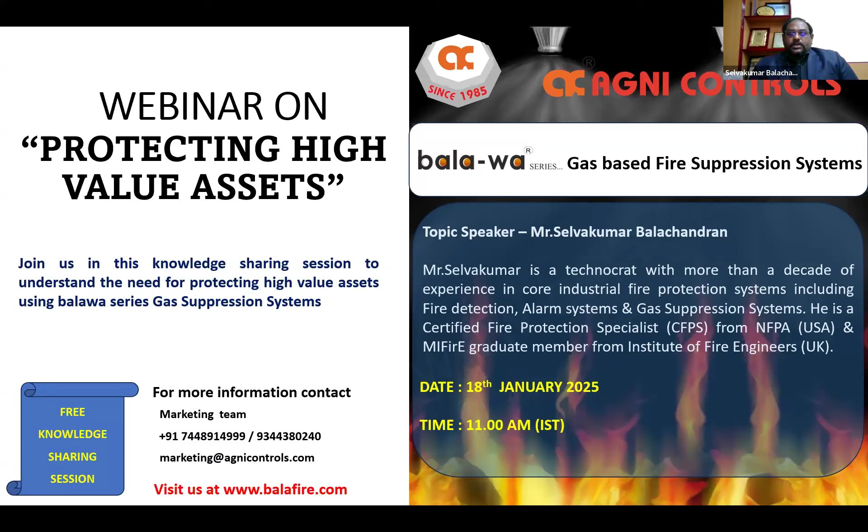Agni Controls is an industrial fire protection OEM manufacturing company and a turnkey solution provider. The company was started in 1985 by our founder and group chairman, Mr. D. Balachandran. He's an industrial expert and a stalwart in the fire protection industries, known throughout the fire protection industry across the world.

We initially started as a custom-built electrical panel manufacturer way back in 1985, and fire alarm control panels was one of the custom-built panels, and that was our journey into the fire protection industry in 87 and 88. Our first suppression system, along with the customized fire alarm control discharge panels, was commissioned in 1988 at Thoothukudi Thermal Power Plant through Best & Crompton. From there began our journey into fire protection, predominantly in gas suppression systems and customized fire alarm control panels and discharge panels.

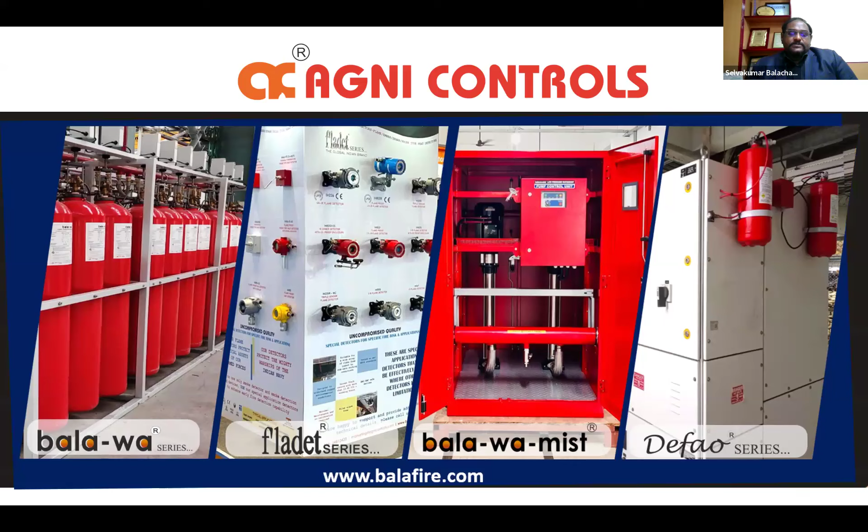We at Agni Controls offer products and systems in the following brands. Bala-wa series, which is gas-based fire suppression systems.

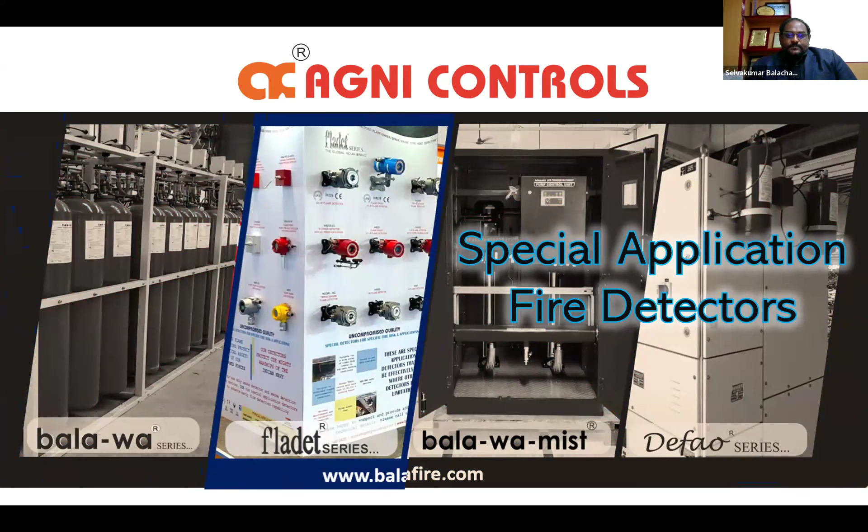Fladet series, for special application fire detectors such as heat, spark, ember, and high temperature probe type heat detectors. Bala-wa-mist, water mist fire suppression systems, including low pressure and high pressure water mist systems. And Defao series, which is tube based detect and extinguishing fire extinguishing systems.

So today, going to the topic, protecting high value assets using Bala-wa series gas-based fire suppression systems. When you talk about gas-based fire suppression systems, we have carbon dioxide fire extinguishing systems, inert gas fire extinguishing systems, and clean agent fire extinguishing systems.

So inert gas is also a clean agent. As per NFPA 2001, inert and chemical-based extinguishing agents both are covered under NFPA 2001. The reason why I put it separately is because inert is a naturally occurring gas, whereas the other chemical-based fire extinguishing agents are manufactured for the purpose of fire protection.

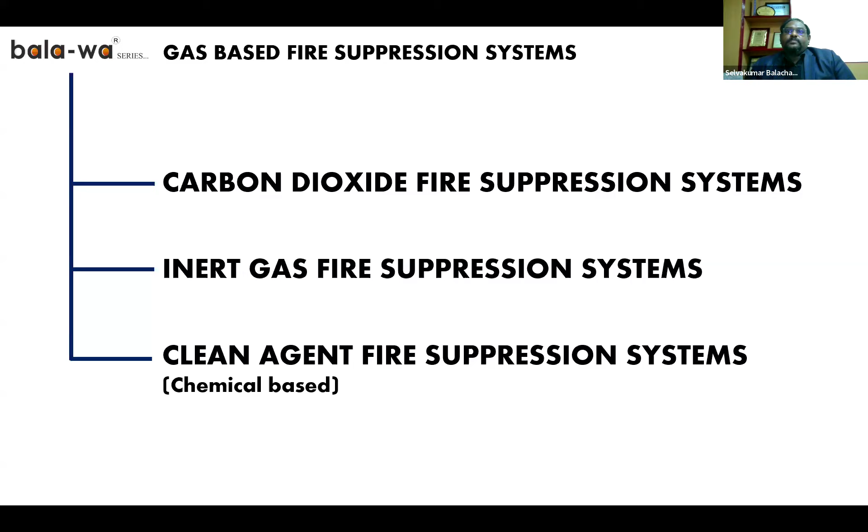So I want to clearly show a differentiation between the inert and clean agent system. This particular topic, high value assets, is a very big topic, and I will not be doing justice if I squeeze in everything in this very small, brief time of 30 to 40 minutes. So what I'm going to do is split this session into two sections or webinars. Today, predominantly, I will be talking more about carbon dioxide fire extinguishing systems.

So when you're talking about high value assets, what are we talking about? Now with the time and modern technology, AI driven technology, data, everything, all the machineries which used to be conventional are now turning into smart, and the cost of machineries are very, very high. And if your machine breaks down, of course the entire production line or the process breaks, and the cost for a breakdown is unimaginable in many cases.

For example, a refinery: if a gas turbine is tripped, the power grid collapses. So you can imagine the magnitude of the assets. That is the reason why we are calling them high value assets. It's not just in terms of money; it is also in terms of their value. So if your power grid collapses, restoring it is going to cause a wide blackout, and restoring it is going to be a huge challenge.

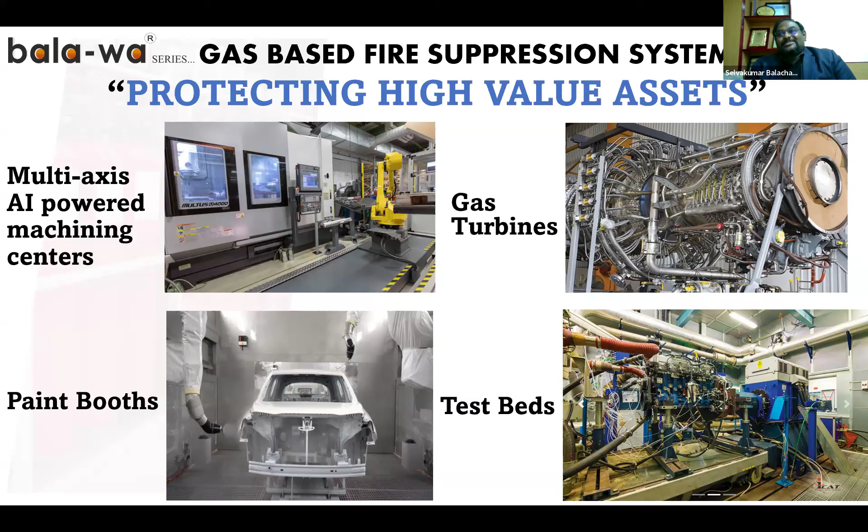So these are some of the images I've shown: multi-axis AI-powered machining centers, gas turbines, paint booths, test beds, or test cells.

So why is it very, very important for us to protect the machineries? Well, this is a small CNC turning machine, and I will just show this small clip. It's a 3-4 second clip. You can watch this clip, I'll play it.

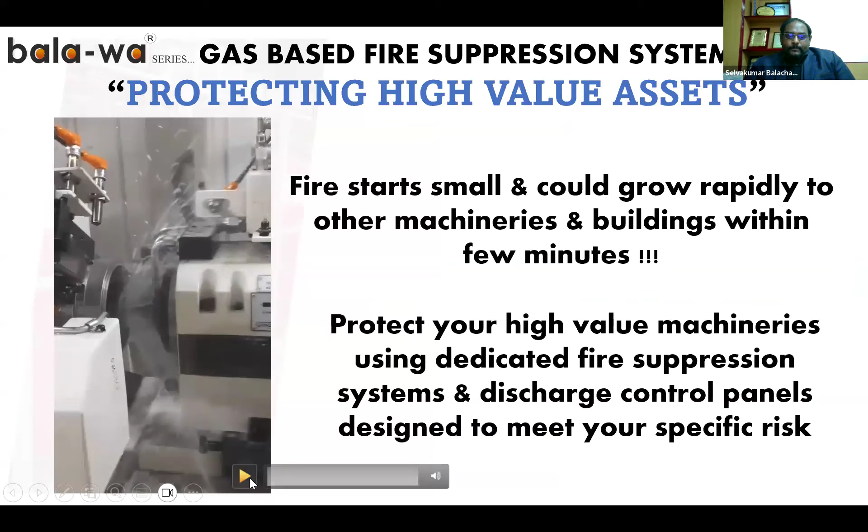So you could have seen that. In case any of you missed it, I would like to play that video once again. So this is actually a machining process.

This is how fire starts in many applications. Fire starts very small, and if we are not equipped to extinguish the fire when it's small, it is going to grow rapidly to other machineries and throughout the entire building as well, within a few minutes or even seconds in some cases, if the calorific value of the fuel or material burning is very high.

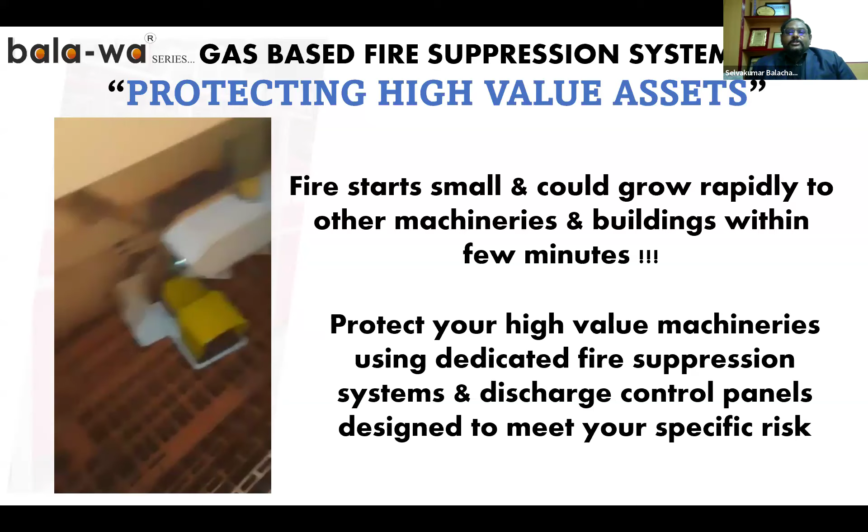It is important to protect your high value machineries using dedicated fire suppression systems and dedicated discharge control panels designed to meet your specific machine risk. There is no one-stop solution—you cannot just buy a common panel and use it for all applications. It may work sometimes, but may not be suitable in many applications, which we will discuss in detail in the upcoming slides.

So what are we talking about in terms of protecting high value assets? Number one asset is always going to be human life. Life safety is always the priority, so personal protection. The next big thing right now is data—without data, our entire infrastructure collapses. Production machineries in many continuous process areas—without the machineries, the entire process stops.

Of course, electrical infrastructure—without power, nothing runs. And storage areas are an area of concern where lots of material with huge calorific values are stored, and these areas are often neglected. Test equipment and test facilities—in many cases, the testing equipments or machineries are much more expensive and critical than the actual production machines. So protecting all these different assets becomes our priority when talking about high value assets.

So just for a small comparison, I have listed out what type of system can be used in protecting these assets. Where personnel is present, CO2 cannot be used, which I will discuss in the upcoming slides. Control rooms are normally occupied and it is not safe for human beings there, and water will damage the equipment, so it is not used in many of these applications.

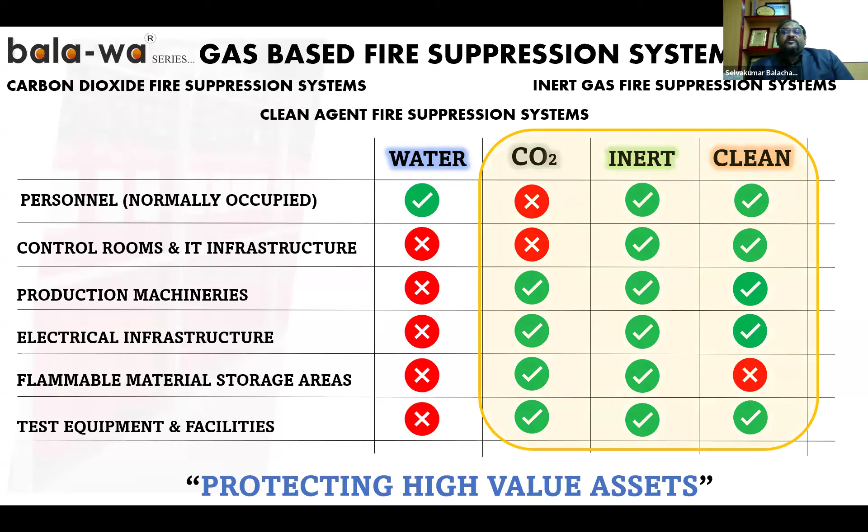As I told you, today we are going to discuss in detail about carbon dioxide fire extinguishing systems and how it protects high value assets. These systems are designed as per the national and international standards IS 15528, NFPA 12, VDS 2093.

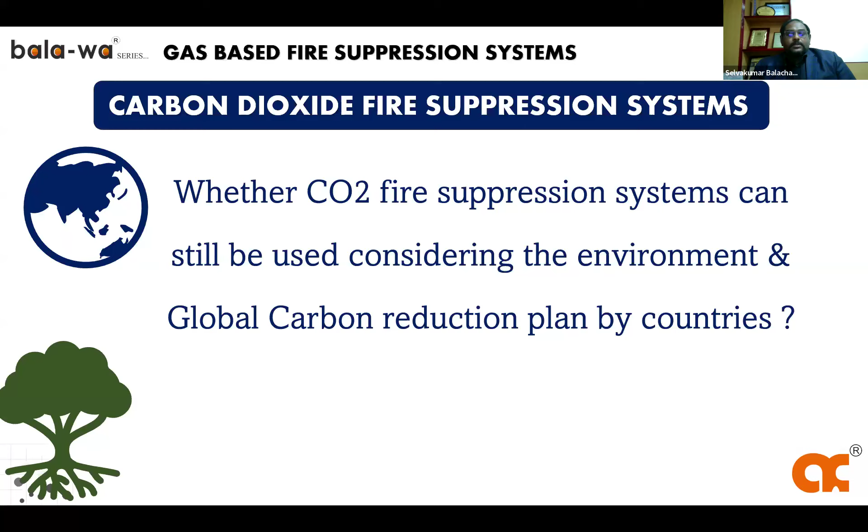Now the real question comes: CO2—when you talk about CO2, we often hear many people ask whether CO2 systems can be used considering the environment. While everyone is talking about green, clean energy, clean power, clean extinguishing systems, you're talking about a CO2 system. Well, today we will break the myth, and in the upcoming slides I will show you why and how.

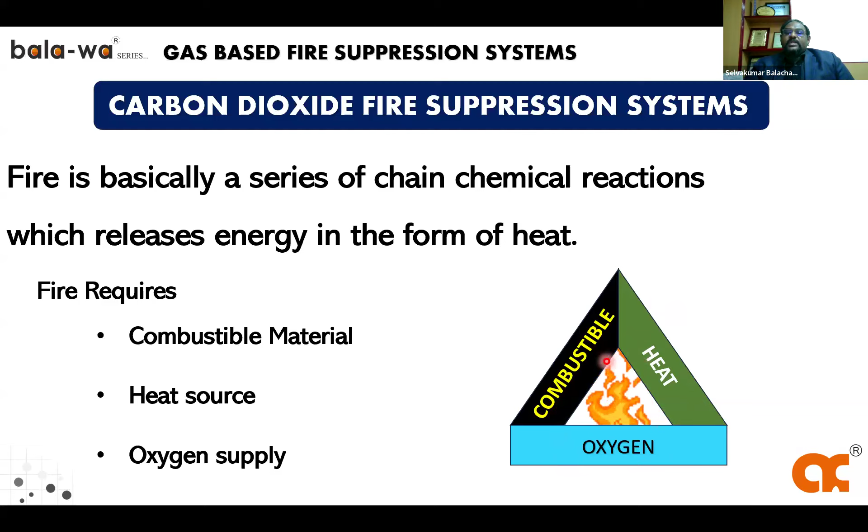Before going into the actual suppression system—fire is a chemical reaction, an exothermal reaction, meaning heat is released in the form of a chemical reaction. This is what we call the basic fire triangle. Any fire to occur requires combustible material or fuel, which is always available in your risk area. Oxygen is always available in our atmosphere at 20.9%. And when sufficient heat occurs to ignite the combustible material, fire occurs.

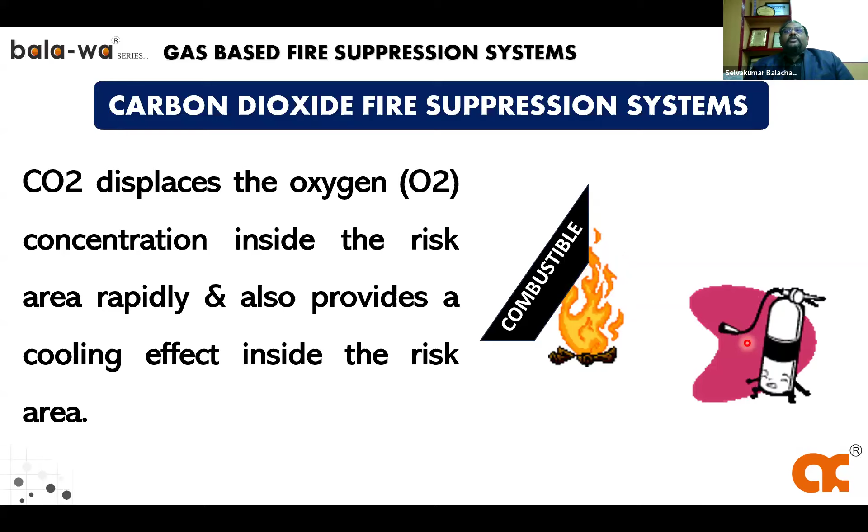So what are we going to do? How does CO2 extinguish the fire? When you apply CO2, it displaces the oxygen with carbon dioxide, and it also has a cooling effect. So CO2 breaks two of the three links in the fire triangle by eliminating, or rather reducing, the heat—it will not eliminate it but definitely reduce it—and by displacing the oxygen content below 14% to ensure that the fire is extinguished. That is how carbon dioxide extinguishes fire.

Carbon dioxide is a very unique gas where, at the triple point, it is available as solid, liquid, and gas. Depending on the temperature, carbon dioxide can be liquid, vapor, or solid. At room temperature and pressure, CO2 is a gas, and when filling it in high pressure cylinders, it is two-thirds liquid and one-third vapor.

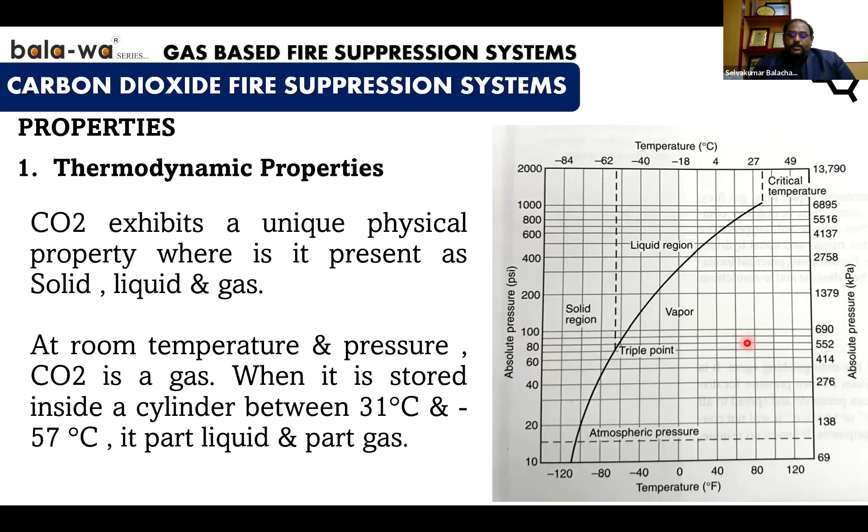So carbon dioxide has another unique property, which is the pressure of CO2 varies with temperature. It is directly proportional. So when temperature is low, the pressure inside the cylinder is low. When the temperature goes high, the pressure inside the cylinder goes high. So an interesting fact is that 1 kg of CO2 will have the same pressure as 100 kg of CO2. And that is the reason why you cannot monitor the contents inside the cylinder using a pressure gauge.

So these are some other theoretical points. I'll just go quickly. CO2 discharges as a white cloudy vapor. This is actually where the transition is happening from liquid to vapor. So the nozzles and the pipeline should be designed in such a way that liquid comes out and converts into vapor at the nozzles only. And this phase transition from liquid to vapor is what you see as a white cloudy fog. So if you discharge a system and you see no white cloudy mist or fog, you know that your design or the hydraulic system is not good.

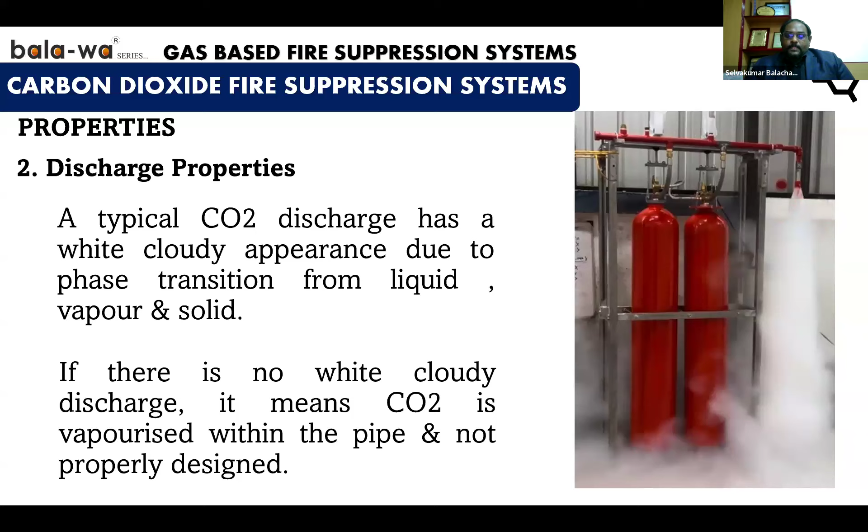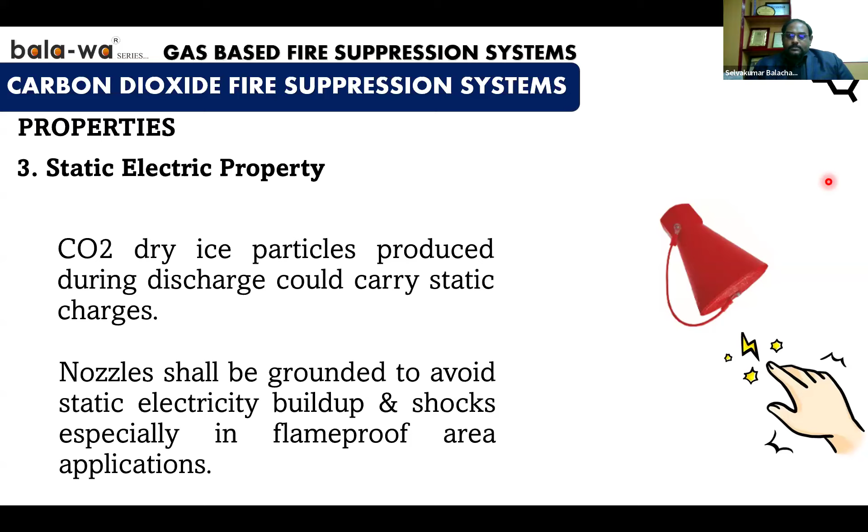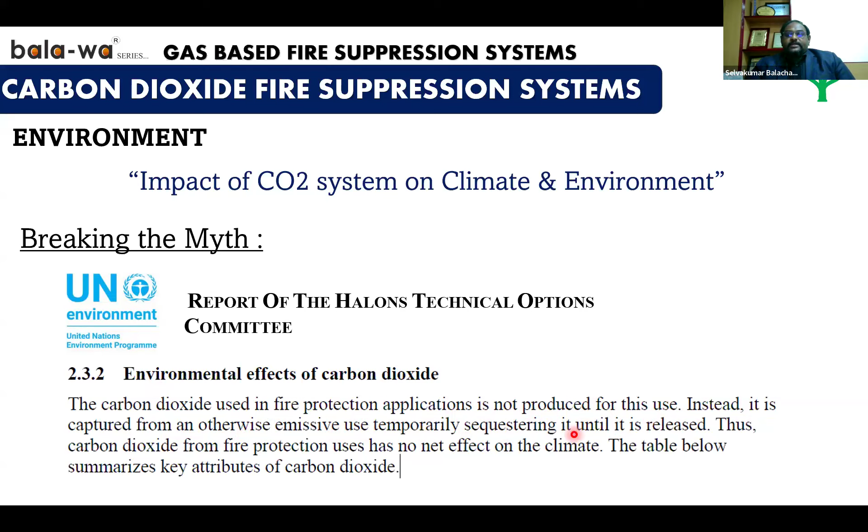So what it says is that, number one, CO2 is not produced for the purpose of firefighting. CO2 is not manufactured just for the sake of fire protection. CO2 is a byproduct in many other chemical processes: petrochemical refining, sugarcane, alcohol. So irrespective of whether you use a CO2 system or not, this CO2 is going to be released into the atmosphere unless the refining, sugarcane, alcohol and many other processes stop. We are not going to stop having CO2. So that is number one.

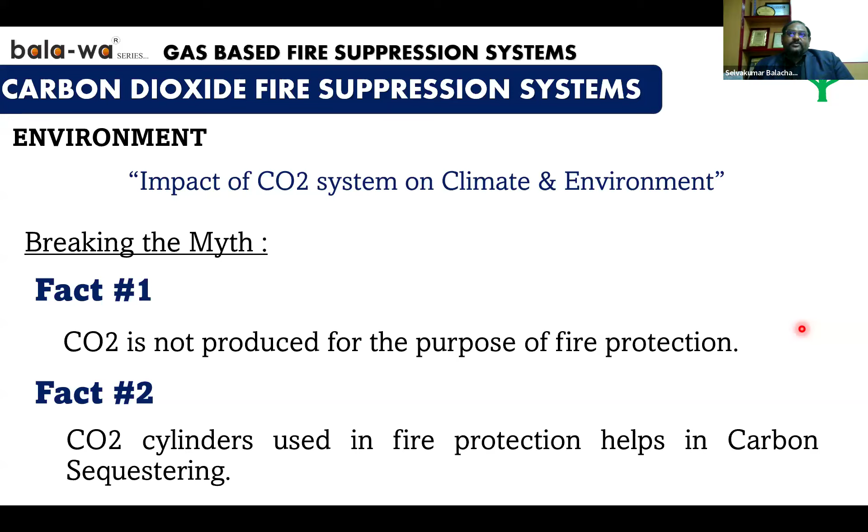So what we are doing is that instead of letting it go into the atmosphere, this carbon is sequestered. So what do you mean by sequestering? Instead of letting it go directly into the atmosphere, we are catching, securing, and storing it inside cylinders. So what we are doing is rather delaying the inevitable. That's what is happening.

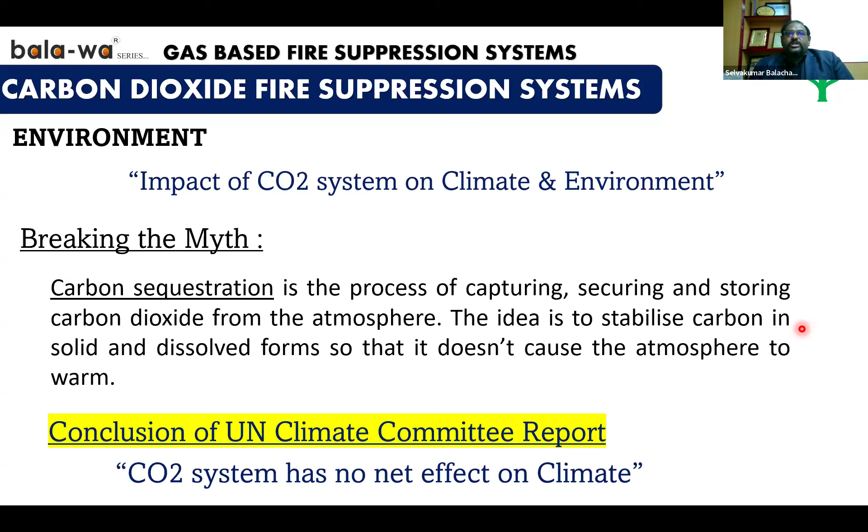And the conclusion was that a CO2 system has no net effect on climate. Which means that whether you use a CO2 system or not, the effect on the environment is going to be the same. And that is the reason why carbon dioxide systems still have standards, not only here in India but throughout the world, even in the European Union, where they talk about climate change. It is not banned, because it is still considered one of the best extinguishing agents for machinery applications and normally unoccupied areas.

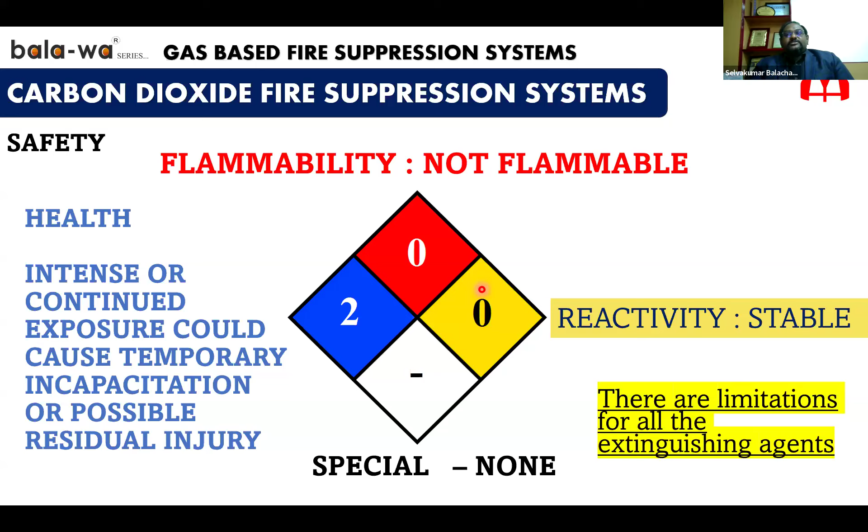So, as I told you, what happens inside the human body once you inhale or ingest? We all know that oxygen is carried in the blood cells to our brain and other parts of the body, all the cells. So, as I told you in the fire triangle slide, oxygen is displaced with carbon dioxide. The same happens in our bloodstream also.

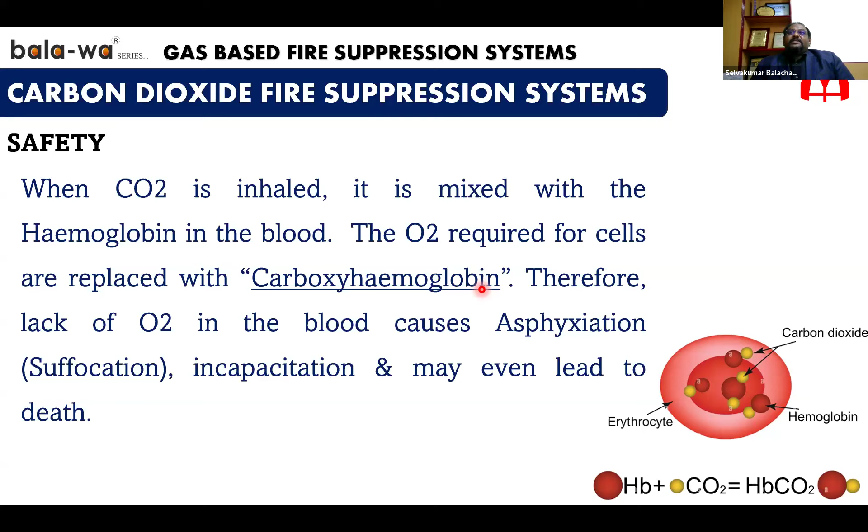So, the oxygen content inside our bloodstream is replaced with carbon dioxide, and the hemoglobin turns to carboxyhemoglobin. And there is a starvation of oxygen through all the cells, including the brain. That is why we have suffocation, asphyxiation, where you fall unconscious and ultimately it may even lead to death. And that is the reason why carbon dioxide systems are not used in areas where human occupancy is always present.

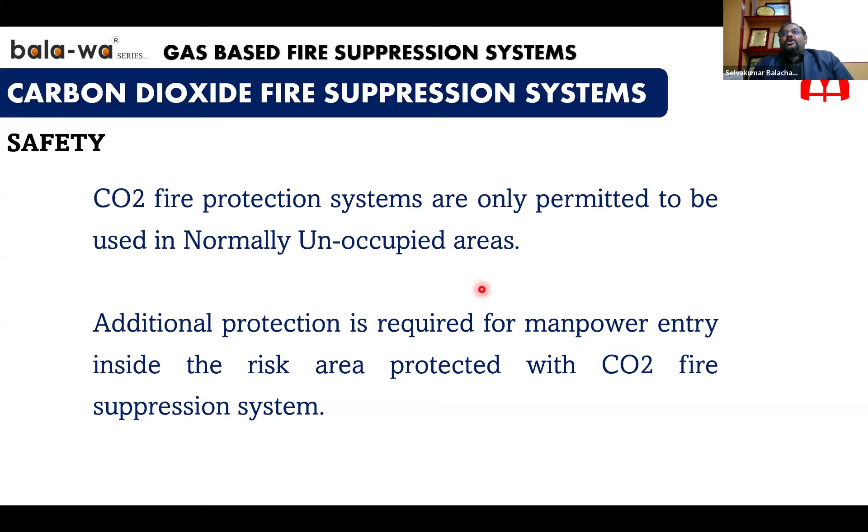However, additional protection is also required. You cannot simply say that I have a machine and no one will enter. Someone has to go inside the machinery to service it or operate it, or in case of overhauling. We cannot completely avoid the entry. So, for that, what needs to be done is to add other safety components integrated with the system.

For example, we have the wintergreen odorizer. The wintergreen odorizer contains a wintergreen oil, which is similar to axe oil or eucalyptus oil. Very strong, pungent smell. So, if you are not able to hear the alarms, or if the electrical system fails, you can't hear the flashers or the hooters, the strobe horns. Anything won't work. But if gas is discharged for some reason, you can get that strong smell even in the adjacent room. If somewhere CO2 is leaking, you know that gas has leaked, and you can evacuate the area. So this is used in machineries to notify people that carbon dioxide gas is released somewhere.

Manual lockout valve: as I said, before entering the machines, the pipeline has to be completely isolated to prevent discharge when a human is inside the machinery. And CO2 evacuation units to extract the CO2. CO2 is a very dense agent, which means that once it is discharged, the gas is going to settle at the bottom. So when you are discharging CO2 in an underground cellar or an oil pit, the CO2 is going to be present at the lower level. And you want to extract the CO2 into the atmosphere so that it is safer for human entry. So all these are other safety equipment that can be integrated with the carbon dioxide system, even for machinery applications.

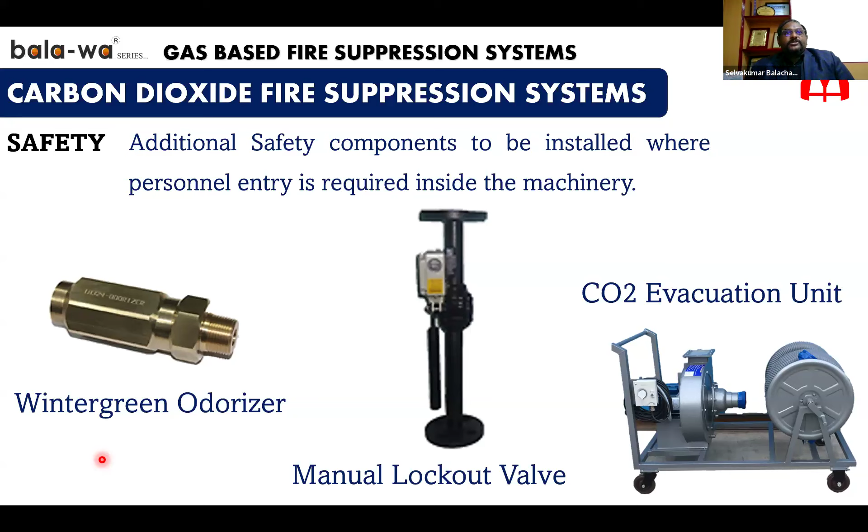So coming to the design basis, CO2 systems are available as high pressure systems and low pressure systems, depending on the storage temperature. As I told you, a high pressure cylinder means ambient temperature, not exceeding 49 degrees Celsius. It is stored in cylinders, which we normally use here in India. Low pressure systems are used for bigger areas where a refrigeration unit and a big bulk container are required constantly. Refrigeration units are required to maintain the entire tank at minus 18 degrees Celsius, so that the CO2 is maintained at 20 bar pressure. The running cost of low pressure systems is very, very high, and that is the reason why we don't use low pressure CO2 systems.

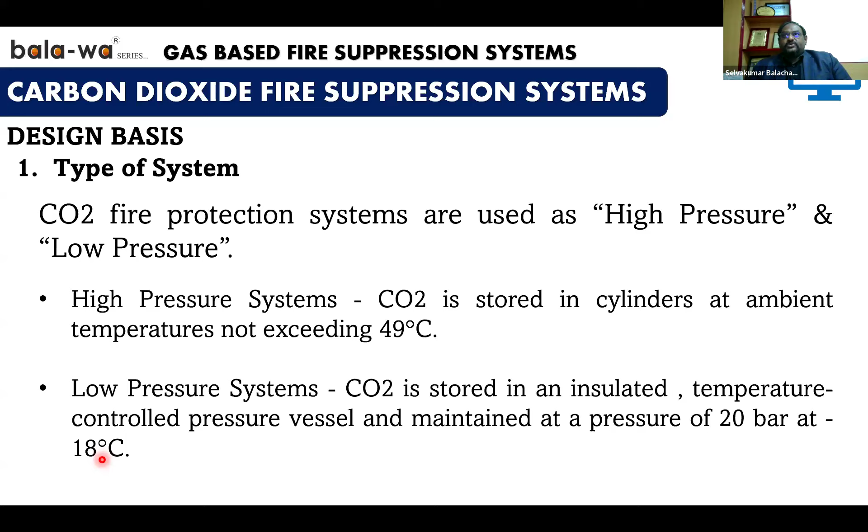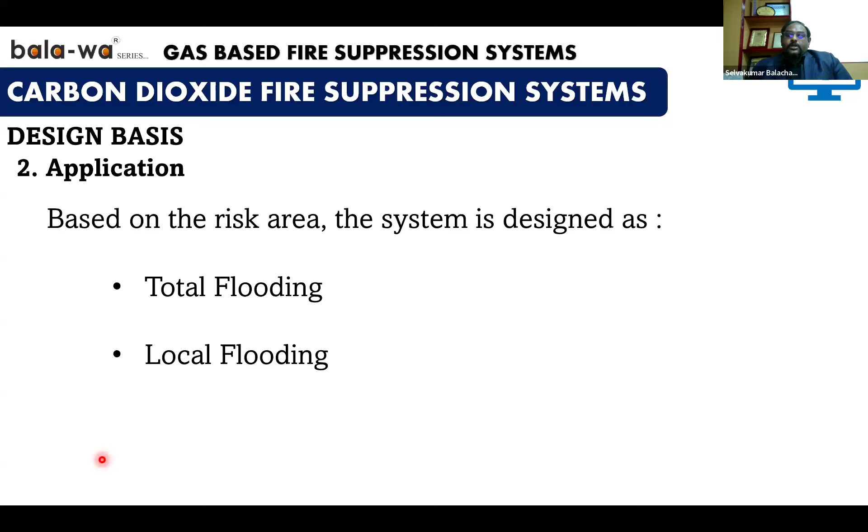And depending on the risk area, the system is also designed as a total flooding system or a local flooding system. So, what is a total flooding system? As the name suggests, the entire risk area, the room or the machinery void, is completely flooded with CO2, and the overall oxygen percentage inside the room is brought down from 20.9% to below 14%, thereby extinguishing the fire. So wherever your nozzles or equipment are, the entire volume is considered, and the overall oxygen content is brought down below 14%.

So we are talking about the overall volume. So we have to consider the openings. If there are any closable openings available or ventilation ducts, all those things need to be considered. Even if they are interconnected, if you have a room next door and it is connected through a small door, it is also recommended to consider it as an interconnected volume, and the volume of the total area needs to be protected.

And local flooding. Local flooding is for areas where it is not entirely covered. So consider a room, two sides or three sides are closed and one side is completely open. And it's open into a very large warehouse or a factory building. You cannot provide total flooding for the entire warehouse of thousands of square feet or cubic meters in volume.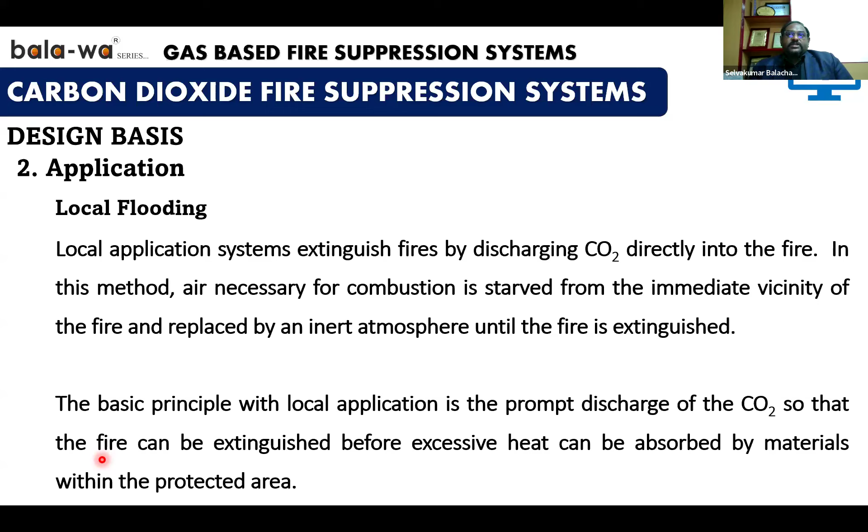Here the nozzles are provided in such a way that they target directly the risk application. For example, you are protecting a rolling aluminum mill. The nozzles are positioned in such a way that the liquid part of CO2 is directly discharged on the actual fire risk areas like rollers or drums or wherever fuel lines are going. So here we will have a larger number of cylinders, or more quantity, than in the total flooding system.

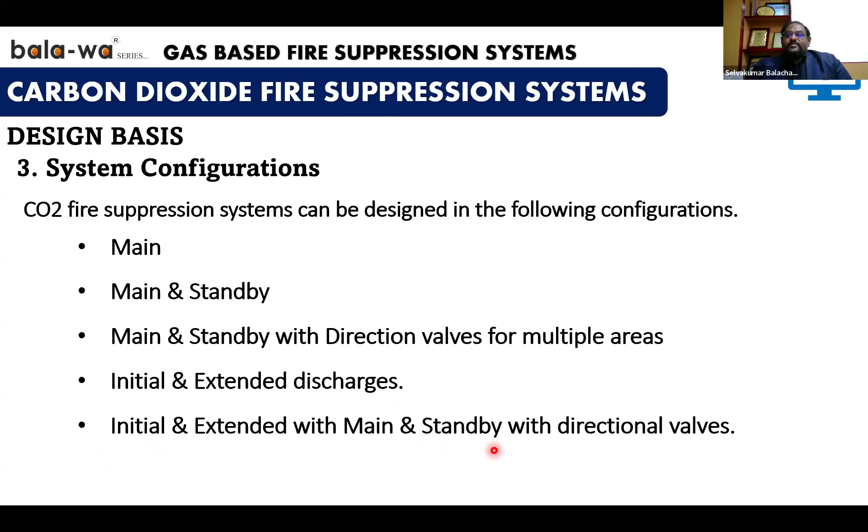So, depending on the risk area, the cylinder systems are available in various configurations. Main, main and standby, main and standby with directional valves for multiple area protection, initial and extended discharges, and initial and extended with main and standby with directional valves. So these are the different types of configurations. Main is used for primary protection of the risk area. Main and standby, primary protection with 100% online redundancy. Main and standby with directional valves for multiple area protection using a common cylinder bank.

Initial and extended, as per the standard recommendation. When it is used to extinguish fire in rotary energized electrical equipment, you need to give an initial discharge, which will quickly extinguish the fire within 60 seconds, and then an extended discharge varying from 5 minutes to 40 minutes or even to 1 hour, depending on the machine which is protected. The purpose of the extended discharge is to keep the oxygen level below 16% for as long as possible, which I will explain later on. And the final one is the initial and extended with main and standby with directional valves.

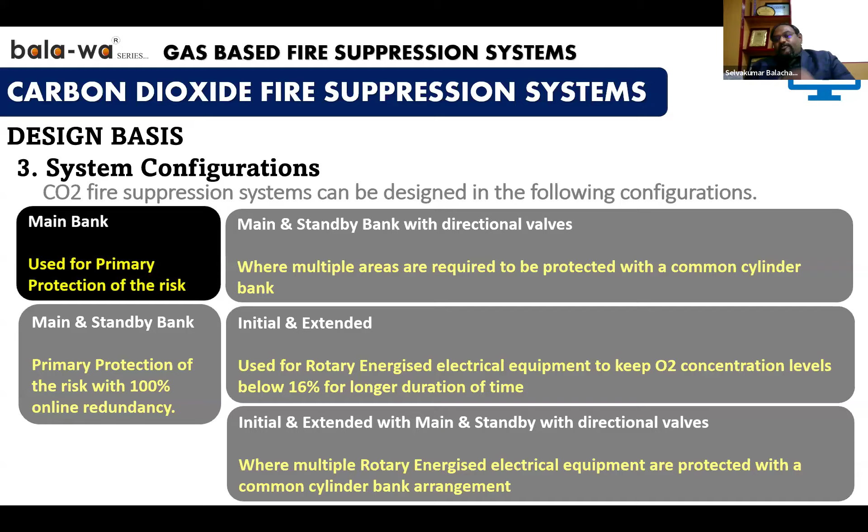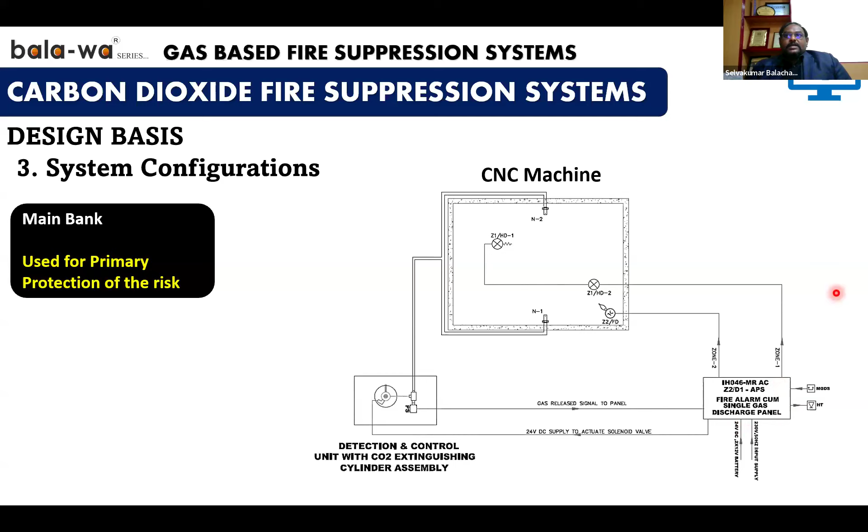So for our understanding, I've just put a small schematic configuration of the main bank. This is a compact CNC machine where we have two nozzles and a single cylinder. Only one single cylinder is protecting this machine. Here you can see that when we are talking about fire extinguishing systems, we are not just talking about cylinder, pipe, and nozzle. This is a system, and the system requires early fire detection, a discharge control panel, and the evacuation units. The tripping, everything has to work in tandem to successfully extinguish the fire. So it is not only the cylinder or the pipeline or the nozzles, it is the entire system which has to be perfectly designed.

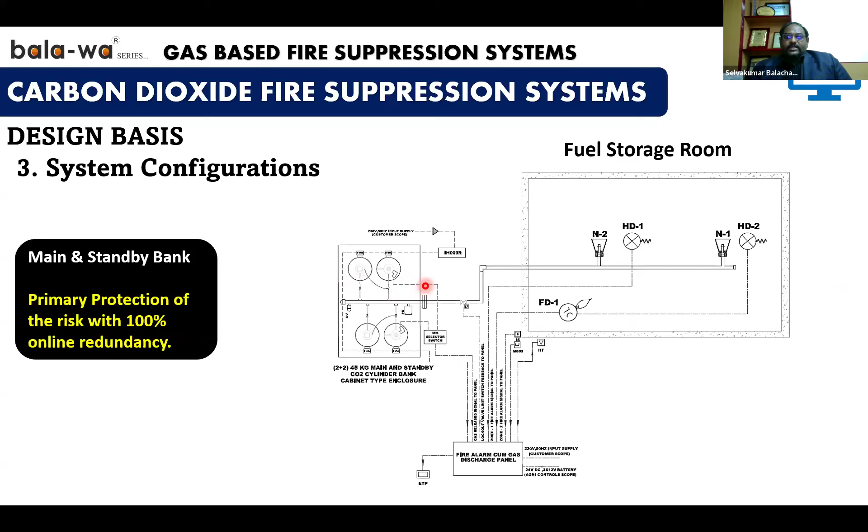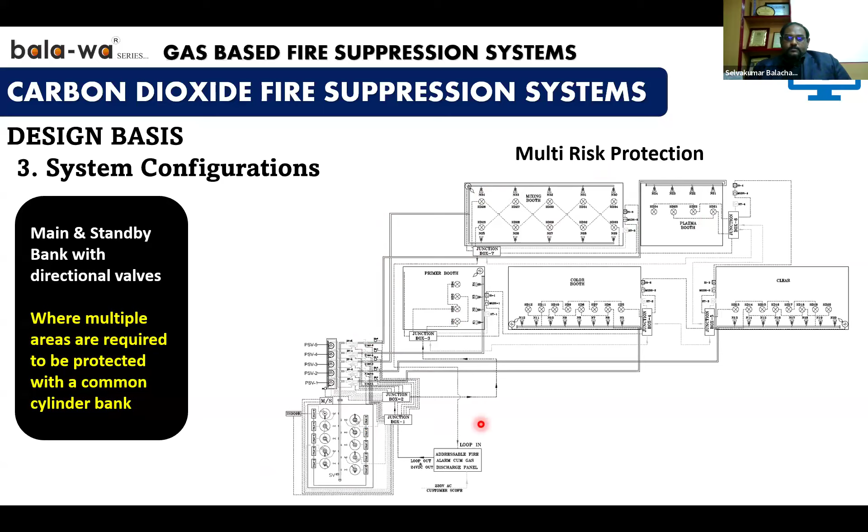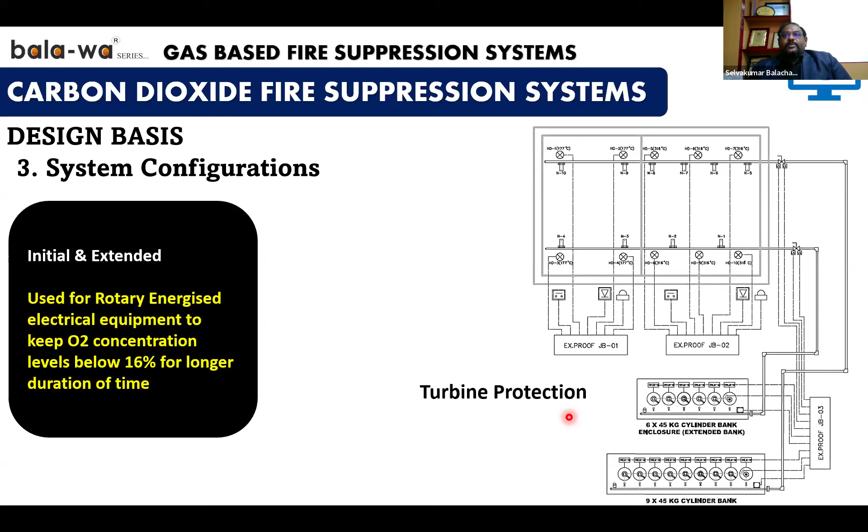Here, the extended cylinder quantity, you need to know that it is not always the same. Extended cylinder quantity is actually designed, as I told you, based on the duration of discharge required and the volume we are trying to protect.

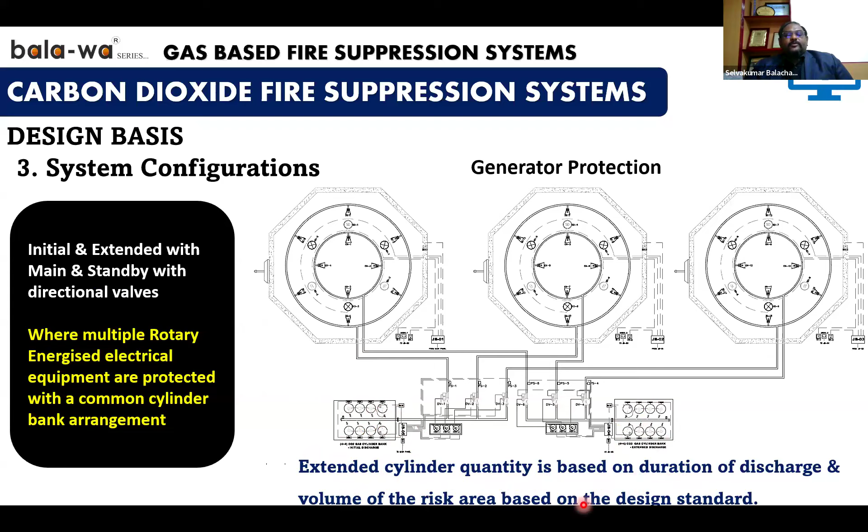So, what are the factors that we need to consider while calculating the quantity of CO2 that is required? Number one, the volume you are going to try to protect. What material or fuel is available inside that risk area? Any area-specific risks like an explosion-proof atmosphere, or any openings, or any fuel lines that need to be tripped, openings that cannot be closed, ventilation systems which cannot be shut down, temperature of the protected areas, all those things shall be considered.

So here, with unclosable openings, if the anticipated loss of agent is more than 40% of the risk volume, the system shall be designed as a local flooding system as per the NFPA. And as per VdS, it is just 2%. So if your unclosable opening is more than 2%, you need to design the system as local flooding as per VdS 2093.

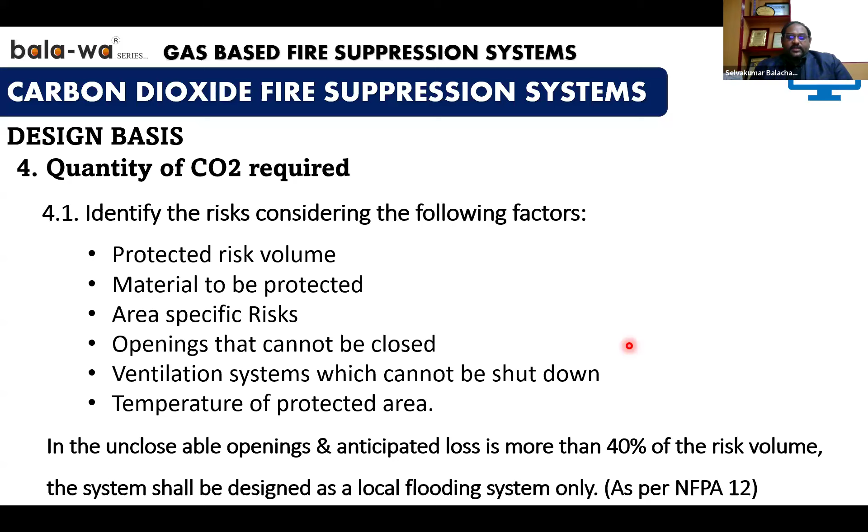So we're talking about flooding factors. What is a flooding factor? Flooding factor is nothing but the quantity of CO2 required per meter cube of the volume. All these details are clearly given based on the test results in IS 15528 Table 3 and NFPA 5.3.2.2. So, what are the other factors that we need to consider? Volume, temperature, loss, material conversion, and deep-seated fire.

There are two types of fires, surface fire and deep-seated fire. Deep-seated fire means on the surface it may seem as if the fire has been completely extinguished, whereas underneath the surface the fire will still be present. And once the heat has come up, it is going to come into fire again. So deep-seated fire requires additional concentration as per the standards also.

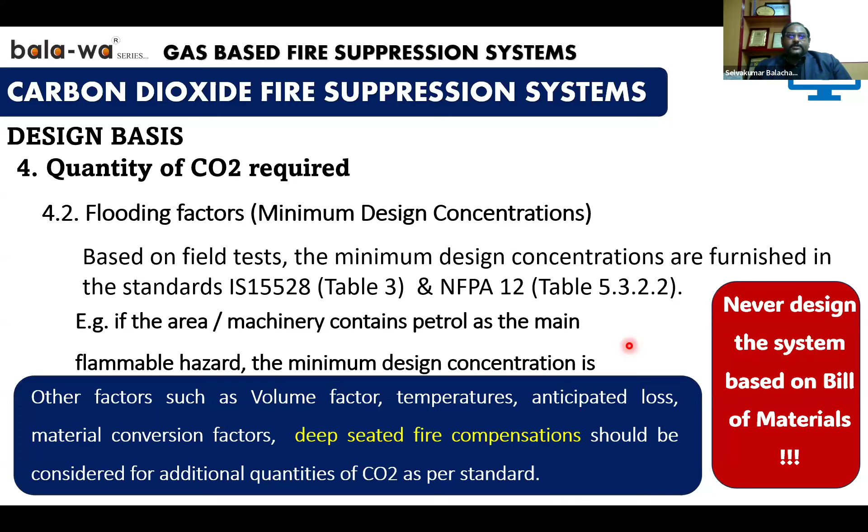And what I would like to insist is: never ever design your system based on a bill of quantity. How many times have we experienced, as fire protection specialists, that your BOQ comes and you are asked to quote as per BOQ? I would suggest to the experts and the people who have participated in these events, if you get a BOQ and you have been asked to quote, please ask them to send the design data, design the system as per the requirement, and only then quote. This is my humble request.

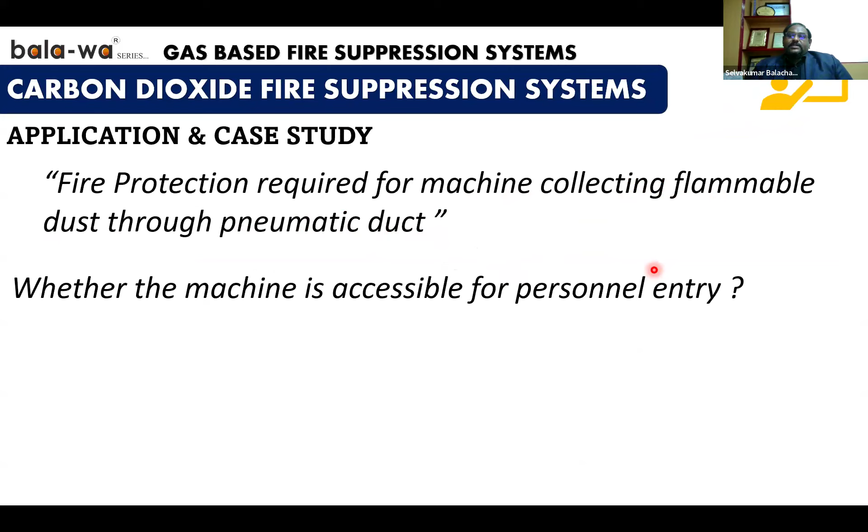And the hydraulic calculations, to validate whether your CO2 system is designed properly, using licensed and validated VdS software. So we are going to take a small case study and an application. Here, this case study is fire protection required for a machine which is collecting flammable dust through a pneumatic duct arrangement. The first question is whether this machine is accessible for personnel entry. These are dust collector machines and manual entry is not possible. So it is a no.

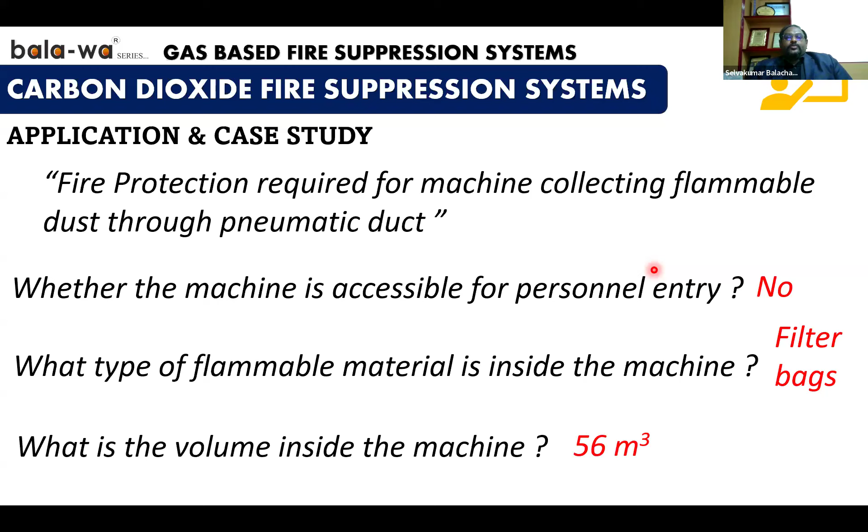The next primary question would be, what type of flammable material is available inside the machines? These dust collectors will have filter bags inside them, often made of cotton or other synthetic material, to filter the dust. And what is the volume inside the machine? That is the risk area we are going to protect. Let us say, for example, the volume of the risk is 56 meter cube.

Let us consider the design temperature as ambient 30 degrees Celsius. The minimum design concentration or flooding factor required is 2.66 kg per meter cube, as per the standard table given here; for specific hazards it is already listed. So what is the quantity of CO2 required? It is 56 into 2.66, which comes to around 149 kg of CO2. It is always safe to consider a 10% leakage factor through hoses or any nipples not properly tightened during installation, or any other reasons. Always consider a 10% leakage factor.

So multiply that into 1.1, you get 163.9 kg. Here we generally use 45 kg CO2 cylinders, that is 68-liter water capacity. So what I've done is I've divided by 45 and I got 3.6 cylinders, which is approximately around 4 numbers of 45 kg CO2 cylinders. So you might consider, okay, I can use maybe 3 numbers of 45 kg and 1 number of 34 kg, just to meet the direct requirement.

Well, the standard does not permit that. Mix of various sizes of cylinders is not permitted in the same bank. So the standard clearly does not permit us to use various water capacity sizes inside the same cylinder banks. So that should not be done.

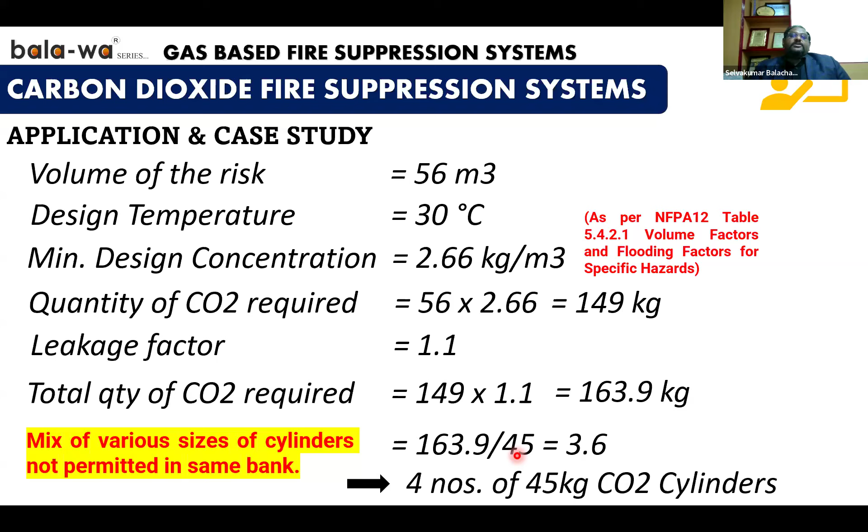Now, flammable dust explosion is a very, very serious issue, and dust many times can lead to a devastating fire. Generally, for room protections or other things, we go with a cross zone fire detection. Here, since the risk area is very, very sensitive, we'll go with a single zone.

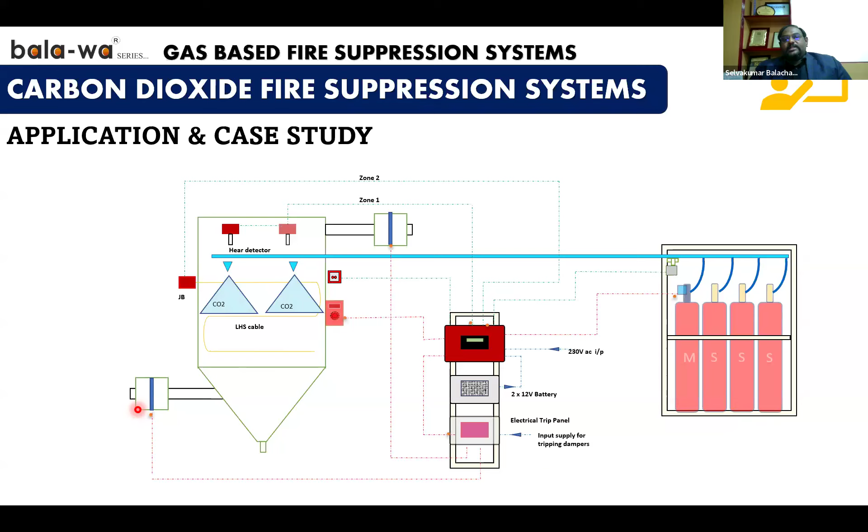So why I was talking about the entire system is that if you don't trip the dampers or any process line or fuel line coming inside the area, the CO2, once it discharges inside the risk area, is going to go out directly through the inlet and the outlet ducts. Thereby, fire will not be extinguished inside the area because the volume is very high. So you need to contain the volume first and then extinguish with the extinguishing agent. So this is the typical application we have seen today.

So the control system should be designed to support the fire suppression system, meeting the requirements. As I explained many times, it's not just the cylinders, it is also the entire control system. Early fire detection is very important. Choose the right detectors for the right application, which we have seen in the previous webinar, and we will also cover later on. The design of the fire suppression system shall be based on the hazard identification and the risk assessment. As I explained before, there is no one-stop solution for everything. Each risk has to be assessed separately.

Interlocks with the other processes which may affect the performance of the system should also be provided. For example, if the door is opened, the CO2 system should not be discharged. Or if the CO2 is discharged, the incoming fuel lines or the HVACs, everything should be tripped.

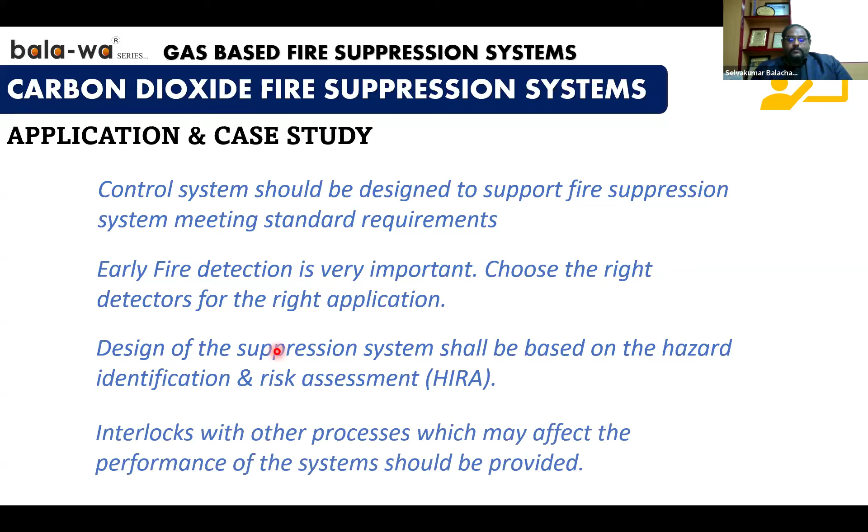And once you have designed all these things, how to validate, how to know whether what you have given is actually working in the field? You can validate using the concentration measurement method. Post discharge, you can measure the residual oxygen level inside the risk area to know that your oxygen percentage is below 14% after discharge. So if it is below 14% after discharge, you know that your system is perfect and it is going to extinguish the fire at any cost.

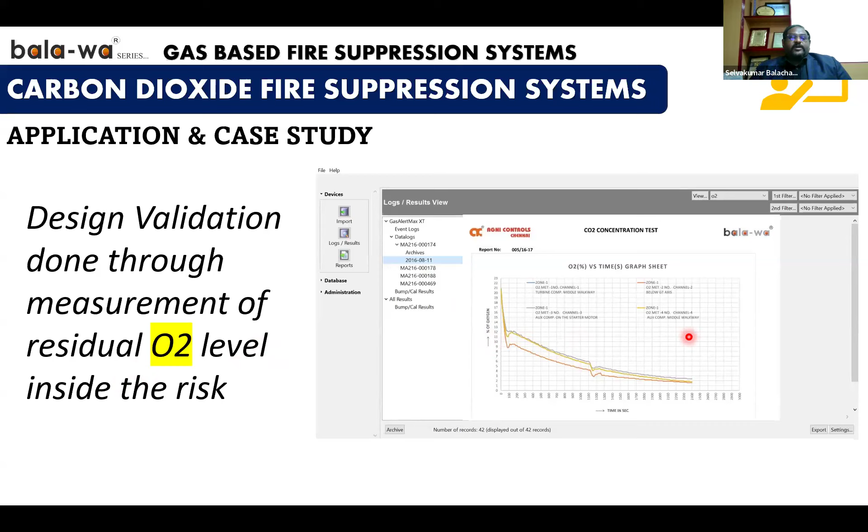Coming to the final part, which is the most important part in my view. In many cases, post handover, the systems are designed perfectly, installed, commissioned, and handed over to the customers. So what happens post handover? We need to educate the users to let them know what they need to check for, whether the cylinders have a valid PESO certificate.

It is a mandatory requirement as per the Indian Gas Rules Act. Valid means it's like 5 years. Every cylinder has to be hydro tested once every 5 years. If there is a need to be hydro tested, it has to be sent for refilling, discharged, refilled, hydro tested, and sent back and recommissioned. It is a mandatory requirement as per the gas cylinder rules of India.

Visually inspect all the components and check if the components are fitted. In many cases, I have personally seen they would have tested or discharged the system. In case fire would have happened, the cylinders would have been discharged. They would remove the cylinders, send it for refilling, and then bring it back and reconnect.

In many cases, we have seen that the cylinders are not properly connected, or rather connected wrongly. There are several valves which have a separate filling port and a separate discharge port. The hoses are wrongly connected to the filling port rather than the discharge port. In many cases the customer is not aware of what to do, and therefore when fire happens, it's not going to put off the fire.

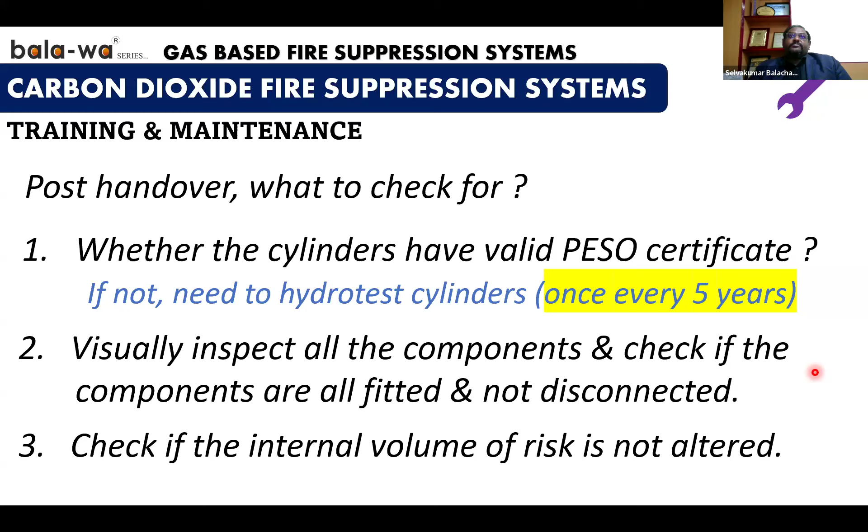Also, customers changing the internal volume of the risk area - there would be a sudden expansion. They would have increased the volume, maybe instead of 56 meter cube, they would have gone to 66 meter cube. For them it's just a 10 meter cube volume increase, but for the fire suppression system, it may not be efficient. So that is also something we need to consider post handover.

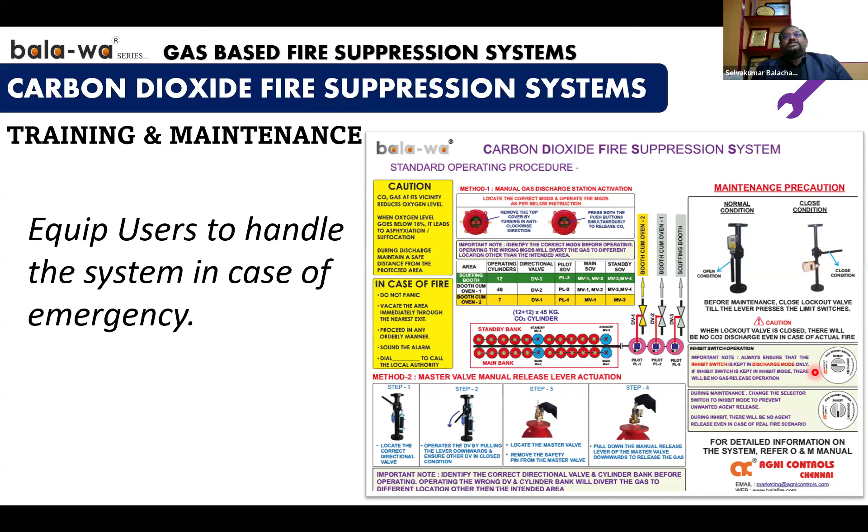We need to equip the customer to handle the system, since this is a high pressure system - to handle, operate, and maintain it in case of emergencies. A brief SOP, standard operating procedure, has to be provided near every risk area or the cylinder bank, detailing almost everything possible to help them do maintenance, what they should do in case of emergency, how to operate in case the panel is dead, how the cylinder can be manually triggered - all these details have to be provided to the customer.

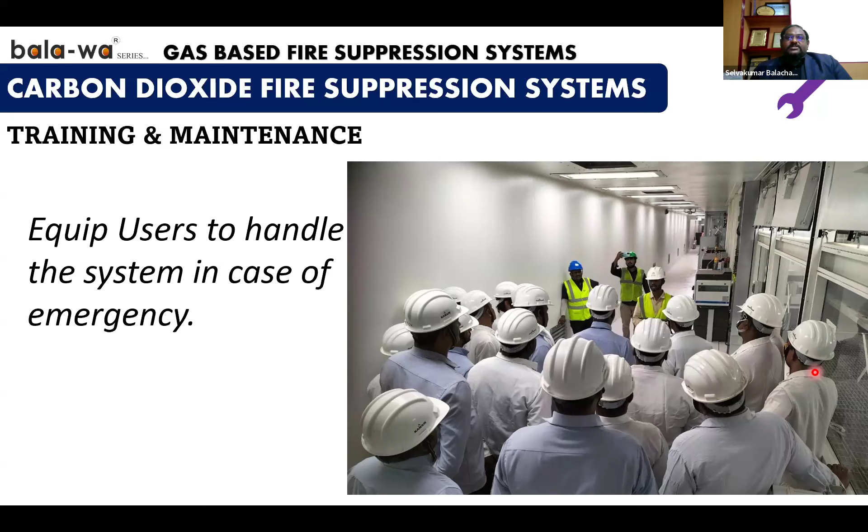And of course, training, which is very, very important. Not only train the heads of people, we have to train the people at the lower level. Even if they are available in three shifts, all three shift people have to be trained properly on the handling and how to operate in case of emergencies. So it becomes very important for us to equip the customer to handle the system ultimately, because they are the users.

Okay, so with that, I have come to the conclusion of the webinar on protecting high value assets using carbon dioxide as the first part.

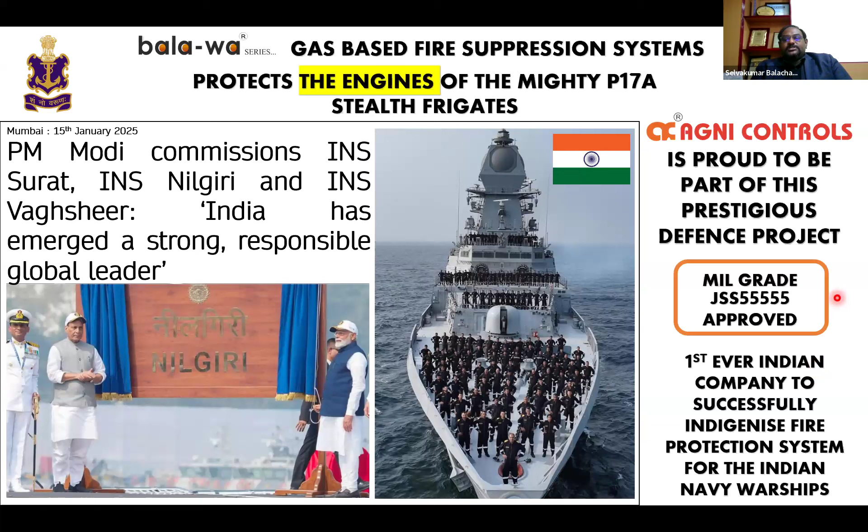Three to four days back, on the 15th of January, our Honorable Prime Minister Sri Narendra Modi commissioned three naval vessels - INS Surat, Nilgiri, and Vaghsheer. We are proud to say that our extinguishing systems protect the engines of the mighty P-17 Alpha stealth frigate, which is the INS Nilgiri. Agni Controls is proud to be part of this prestigious defense project. Our equipment is MIL grade and JSS 55555 approved, and with that, we have become the first Indian company to successfully indigenize the fire protection system for the warship navies - previously it was from the Russians.

I take this opportunity, and that's my time. I thank you so much for listening to me patiently, and if you have any questions, we'll take it forward.

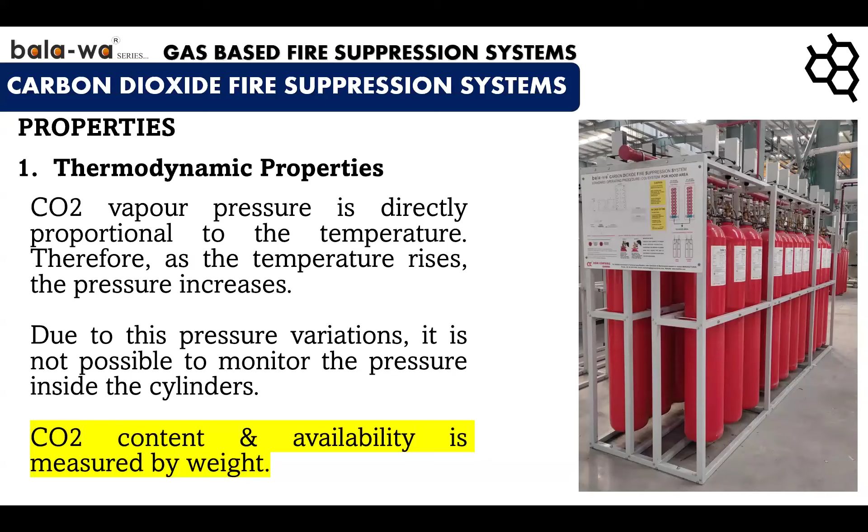Understood, Salam ji, 10%. My doubt is you are giving the total of the installation system. I want to know about your individual cylinder. Do you have any such system for individual cylinders without disturbing or taking them out, sir? Yes, I can get that. So this unit is for each cylinder, individual cylinders only. So any individual cylinder which is having more than 10% weight loss, that cylinder will be indicated.

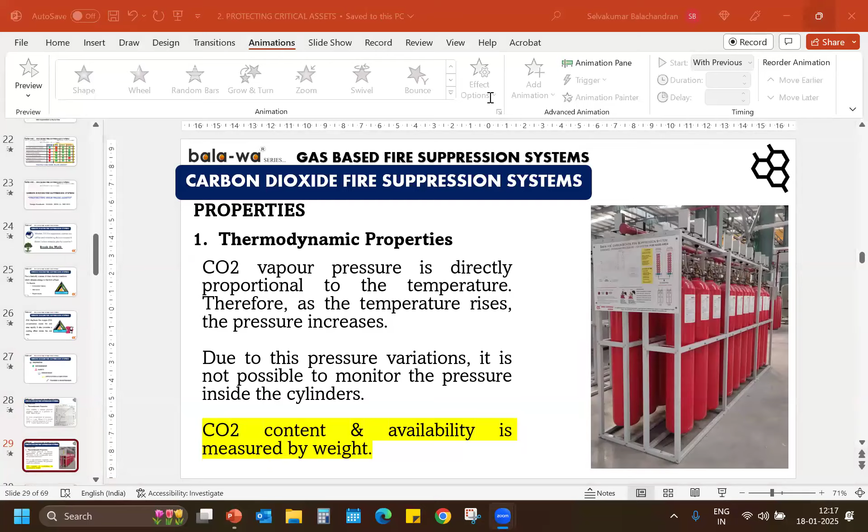And depending on the model, we have two models. One model has the individual LED display, so it will have two LEDs—one for normal indication in green color, and one in orange for check-for-refill. So if there is a 10% loss in, let's say, cylinder number 3, only that unit will show the orange color. We understand by pressure gauge only, am I correct?

Not pressure gauge. This is a weight monitor. I thought you would get the weight also—what is the weight? Not weight. Since the standard says 10%, let's say if we are using a 68-liter water capacity cylinder, the maximum filling that can be done is 45.4 kg, which means if there is a 4.5 kg loss, I need to show a low weight indication. So all our units are calibrated to give that 4.5 kg loss output. That is how it is. I agree, sir.

My point is, I agreed that any individual weight needs to be given. As Selva said, it comes under the Weights and Measures Act, but that's a different question. My point is, can it give the correct loss of individual cylinder - how much CO2 is lost? That is not giving the required loss when it goes beyond 10%.

Okay fine, sir Yogeshwar, what I'll do is ask Selvan Arun to get in touch with you directly, maybe over the phone, since we have a couple more questions. We will have a personal, direct interaction with you, sir. Okay fine, thank you for coming, sir.